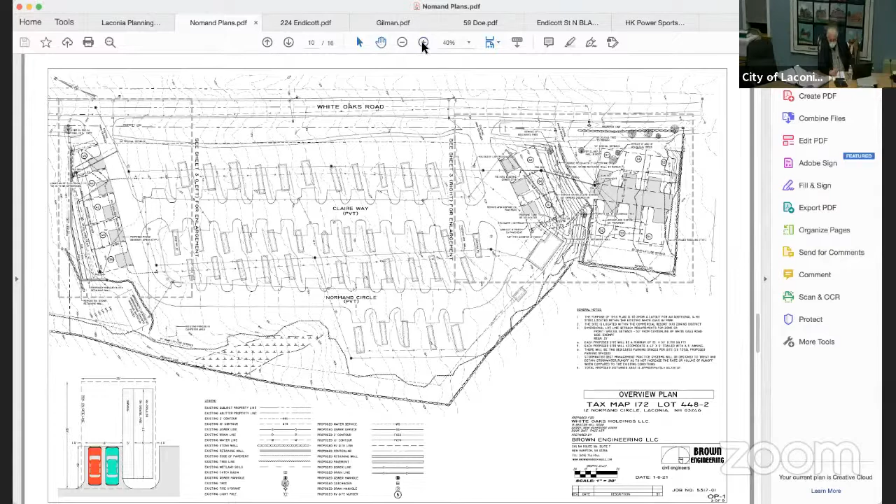The new RV sites that are going to be added, labeled 38 through 46, the even numbers anyway, are going to be built up, and there's a retaining wall being built, and then there's a swale between the actual sites and the retaining wall. That swale will control the runoff from those new sites and direct it to an area near White Oaks Road, where what's left that doesn't percolate through the swale will drain where the present drainage goes right now.

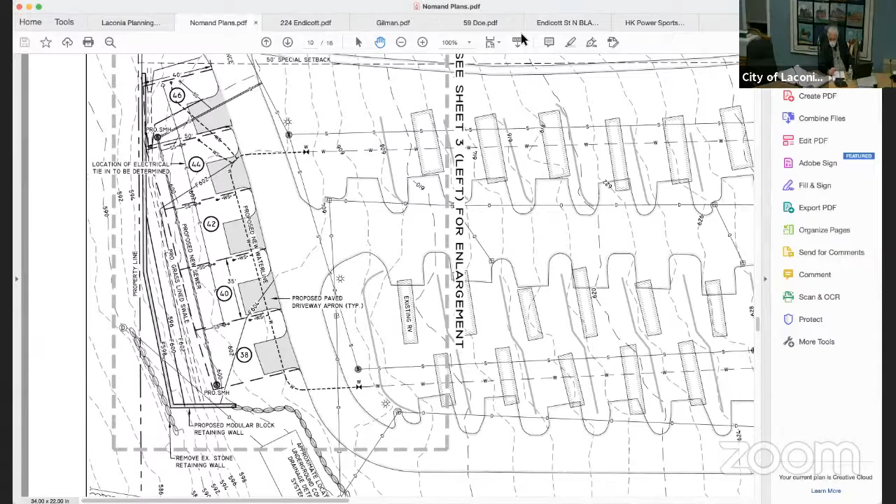By constructing these 5 RV sites, they are in effect eliminating a slope there that drains from their driveway to the adjacent property, and they have mostly eliminated that slope on their property and will contain most of the stormwater on their property. So I know there was a question about what is going to happen to that stormwater, and that's the explanation. The analysis by Brown Engineering shows there will be equal or less runoff onto the adjacent property than is currently the situation.

There was also a question about the existing stormwater structure adjacent to that area, and where the drain line indicated on the plan goes. We looked at an old plan that shows that drain line continues all the way through the adjacent property and goes to the existing stormwater system out on Endicott Street East. So the drain from that stormwater structure does not dump on the adjacent land. It continues in an enclosed system all the way to Endicott Street, where it's joined with the regular stormwater drainage system already in existence on the street.

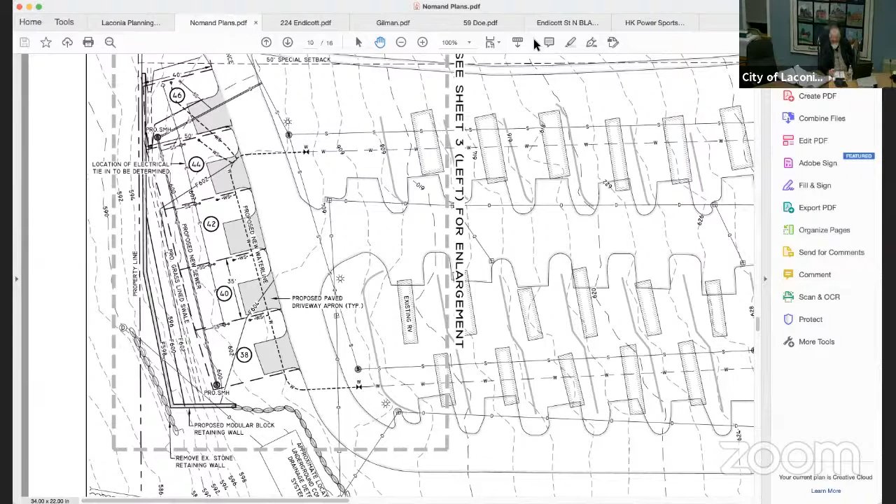So overall, there should be less drainage from this site onto the adjacent subject property. So when the stormwater leaves the property, does it enter a catch basin on the street, which is then conveyed to? The drain line connects directly to a stormwater basin on Endicott Street East, yes.

The swale that's being constructed behind these 5 new sites will capture the water, treat it, and in most cases the water will just percolate through the ground right there. During occasional heavy rain, there will be a discharge from that swale near White Oaks Road, and that will go to the adjacent property just as their stormwater currently does, but the calculations show there will be less of it.

And the swale is intended to treat the stormwater before it is conveyed off, right? Treat it and catch some of it. Yes, so of the siltation and all that. Yes. All right, are there any questions for Mr. Trefethen from members of the board, or for the applicant's representative?

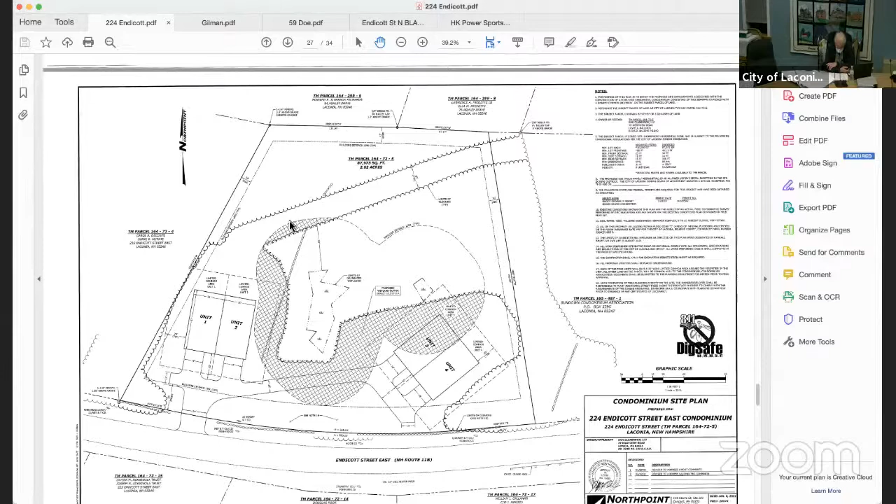We have had a discussion with one of the abutters. The way the stormwater is designed, it is going from the driveways and the roof lines to the existing wetlands that are on the applicant's property. There is already some natural drainage across the land. It goes in a northeasterly direction to the upper right-hand corner of the applicant's property, that's the direction of flow. There are some wet areas on adjacent properties that I suspect are naturally occurring, and I don't see that there's anything that's going to change there.

Okay, because I know that is a maintenance issue, they are in there quite often putting additional salt and sand down. Yep. Okay, any other questions for staff?

Oh hell, Peter, I'm sorry, I do. Don't be sorry, Mr. St. Clair. Pain in the butt, I know. But Dean, I'm just concerned, do you see any downside at all to not requiring the lighting and or the landscaping from your point of view or the department's point of view? Well, we would get to the staff's report probably after the public hearing, right? Well, you asked if we had any questions, so that's why I was asking. Oh, but yeah, that's true.

If they were going to be putting in some pole lights or things of that nature, then we would like to see a lighting plan. Basically the lighting plan shows what kind of lights you're going to have and the foot candle intensity that's going to occur around them. Since they're not going to have any pole lamps, they're only going to have standard residential downward cast lights attached to the sides of the building. There really is no need for us to look at that.

Is that a condition that you're recommending in your staff report? That the lighting we have be done? No problem, we have no problem waiving the lighting plan or the landscaping plan. All right, thank you.

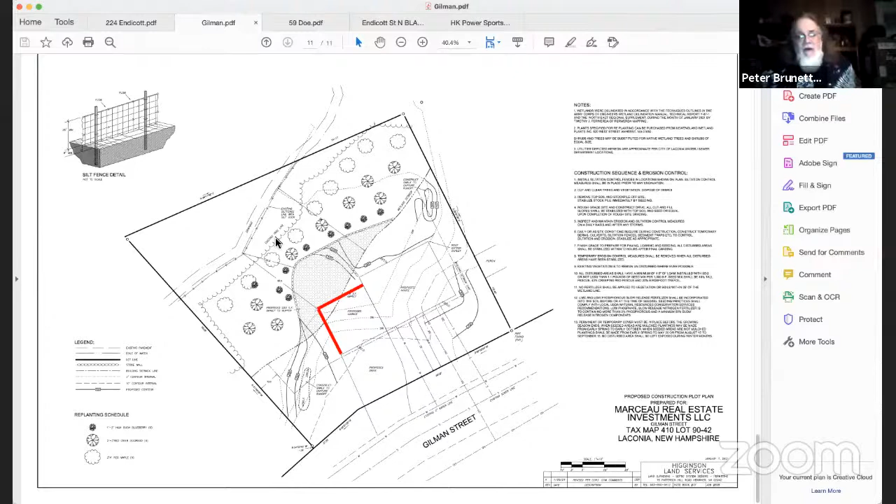All right, any questions from the members of the board for the applicant? All right, let's go to the public hearing then. We're opening the public hearing at 8:32 p.m. Are there any abutters or members of the public that wish to be heard?

Mr. Chairman, no abutters from the public have indicated that they wish to speak for or against the application. All right, thank you. That means we're going to close the public hearing now at 8:33 p.m.

We will listen to the staff report. This application has gone to the Conservation Commission. The original plan called for the garage to be lined up with the rear of the house, and they recommended pushing it forward to get as much as possible out of the buffer zone, which the applicant has done. They also recommended vegetation of certain kinds in the buffer area behind the house, and the applicant has agreed to do that, and we'll do the silt sock during construction.

Staff recommends approval of the CUP and the waivers. In this case, the waiver is for underground utilities. This is a mature neighborhood; all of the other houses have overhead utilities, and unfortunately the utility poles are across the street, which would necessitate cutting into the street to do underground utilities. Given the circumstances, we don't think that's in the overall best interests of the city, so we're in favor of the waiver for underground utilities. I think that's consistent with past practice where we're dealing with infill development.

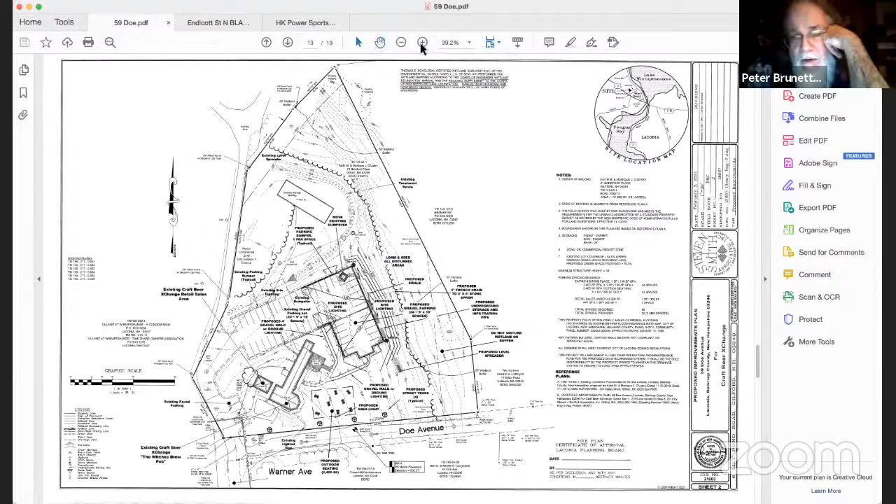It's not located in close proximity to any other properties really where sidewalks or pedestrian pathways are located. It's not near any intersections with controlled traffic. It's not in close proximity to any schools, community centers, healthcare facilities, playgrounds, shopping centers, et cetera, as the ordinance talks about. And I might add that it's on quite a hill and no one wants to walk up that hill. Well, it's not a hazard to aviation either, I hope.

All right, so seriously, thank you. Are there any questions for Mr. Howard?

Sensing none, I'm going to open the public hearing at 8:42 p.m. Are there any members of the public or abutters that wish to be heard regarding the brew pub on Doe Ave? Anybody? Chair, nobody has indicated online or in person here that they wish to speak for or against the application. Okay, thank you very much. I guess we will close the public hearing now at 8:43 p.m.

And the staff will inform us, please. Staff recommendations include approving the waiver again for the sidewalks. We don't believe that this proposal substantially changes the dynamics in the area, that their parking and use is all contained on their site. Not a place that people would normally walk to. Other than that, the recommendations are pretty much normal. There's nothing unusual going on here.

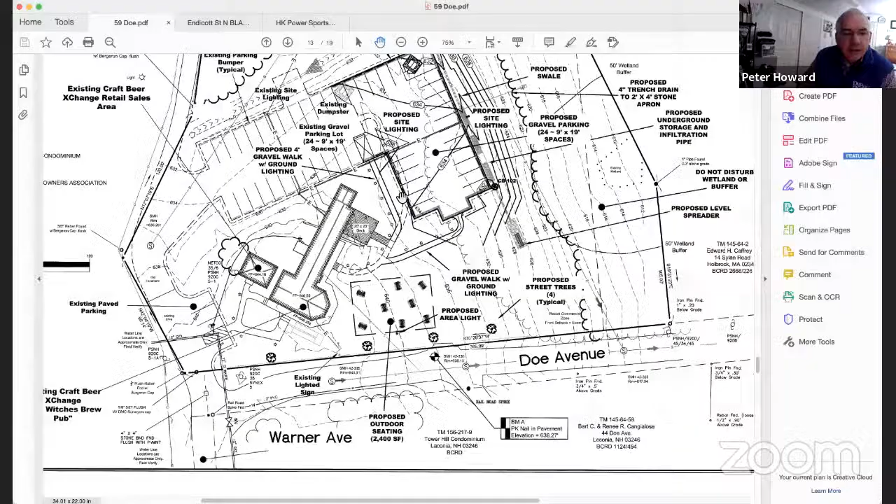On the stormwater, when we made this submission in 2019, if you look at the parking lot that we originally did, it's sort of on the north side of the house. All of that water runoff grades towards the north into a swale, a treatment swale, and then it goes to the far north corner of the property and is outlet by way of a level lip spreader. So what I did on this was I totally isolated the new runoff on the new parking that we're proposing so that it would not mix with the runoff from the original parking that we designed.

The new parking area is graded so that it will go to the east, or downhill, and it's going to be caught in a swale at the bottom, right at the edge of the parking area. I've had two catch basins built; the water will get into those catch basins. They're deep catch basins, so we can get plenty of sump area if we need it. But then we're going to go into an oversized perforated pipe, which is going to be surrounded by stone. That's going to provide the storage and treatment needed for any runoff from this parking lot. And it's only runoff from the parking that's going to go into this stormwater system that we're proposing.

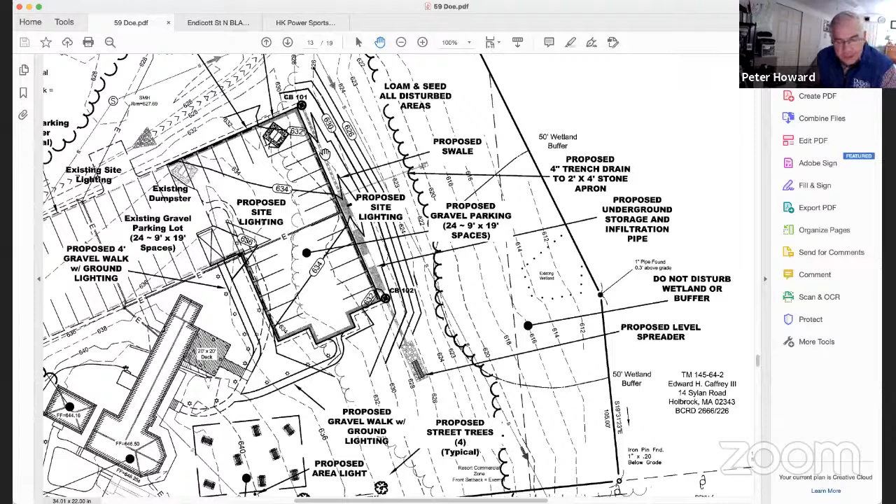No, that was a very detailed answer. Thank you, Mr. Howard. Do the members of the board have any questions for Mr. Howard?

All right. Where are we at now? We have held the public hearing and now we're waiting for a motion, are we not?

Mr. Chair, I have a question. That's probably more towards, I guess, staff. It could be to Mr. Howard, but this is just for the parking spaces and the sidewalk waiver, correct? We're not talking about turning the COVID outside seating into permanent approval, correct?

No, we are talking that. Yes, he wants to set up the outdoor seating on a permanent basis, hence the need for additional parking. Because last year, when they were doing primarily just outside dining, the existing parking that they already had served that purpose because there was basically no one going inside. So the parking that was there serviced the outside.

They're hoping, and I think we're all hoping, that relatively soon, restaurants are going to be able to open up to a greater capacity than they have been recently. And therefore he'll have potentially at some time in the near future, full capacity inside, which the original parking took care of, and also offer the outdoor dining area as an additional seating area, in which case he would need more parking.

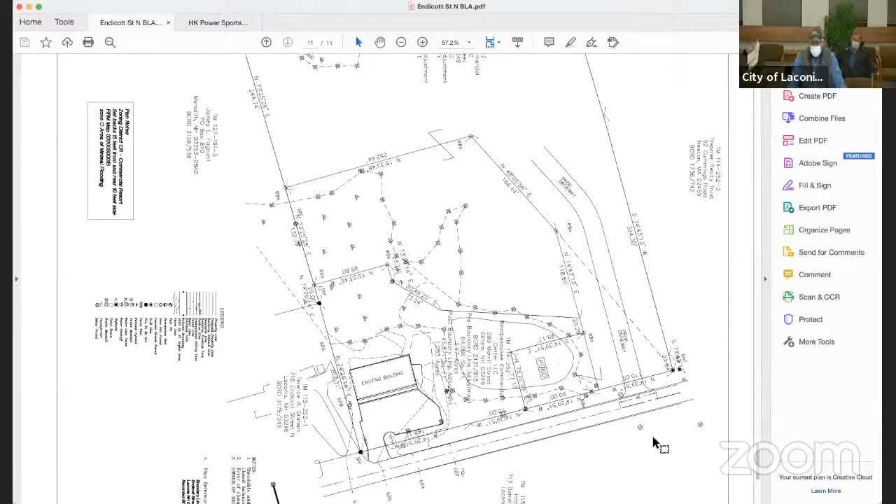I remember this application from many years ago, and a sidewalk waiver was discussed at that time. That's correct, I forget whether it was granted. Is there a sidewalk there? There is not, the state did not allow it. Yes, the right-of-way issue, we're gonna have to get them a seat at the table.

Are there any questions for the applicant? Being none, I'm going to call the public hearing open at 9 p.m. Are there any members of the public or abutters that wish to be heard? Mr. Chair, nobody has indicated they wish to speak for or against this application. Thank you, we'll close the public hearing at 9 p.m.

Staff recommendation, please. Staff recommends approval. There's nothing unusual going on here. I know the proposed new boundary line is a little weird, but there's a reason for that. It's so the existing lot and the adjacent lot both have enough area and street frontage to allow them to exist. Just in case there was a question about that.

Okay, and because this isn't a site plan or a CUP, the sidewalk waiver is not required. Correct. All right, any questions for staff on this application? Sensing none, what is the pleasure of the board?

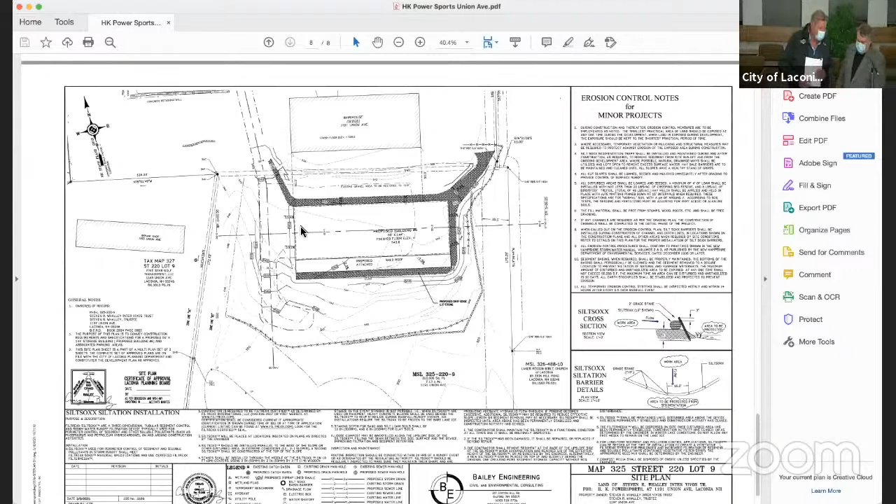And now we would like to hear from the applicant. My name is Steven Whalley, I'm the owner of the property, and I also own HK Power Sports, the business. This is an accessory warehouse building we'd like to construct. It's very similar to three other similar sized buildings, same construction type. We've been here in the last year and got boundary line adjustments and purchased the land behind the golf cart guy, which used to belong to the Bible school. It's almost not visible from Union Avenue in any way.

It'll be minimal impact, less than 2,000 feet of pavement. The building itself is about 7,000 feet, and there'll be about a 1,200 square foot lean-to on the south side of it to park some construction equipment and stuff we have. It will be in character with what we're doing. We've been there for 36 years, and we keep growing and trying to keep things organized and stored properly, and this will be an important link to that.

This is Attorney Phil Brouillard representing Mr. Whalley. Just want the board to understand this is just a freestanding building, and the only utility it has is electric for lights. There's no bathroom, no water, very little else - it's just freestanding storage. We've also had a chance to review staff's application and we agree with all their conditions. We do need to update the plans to show the electric line running from the last building to this building. We thank you for your attention tonight, and if you have any questions, we'd be happy to answer them.

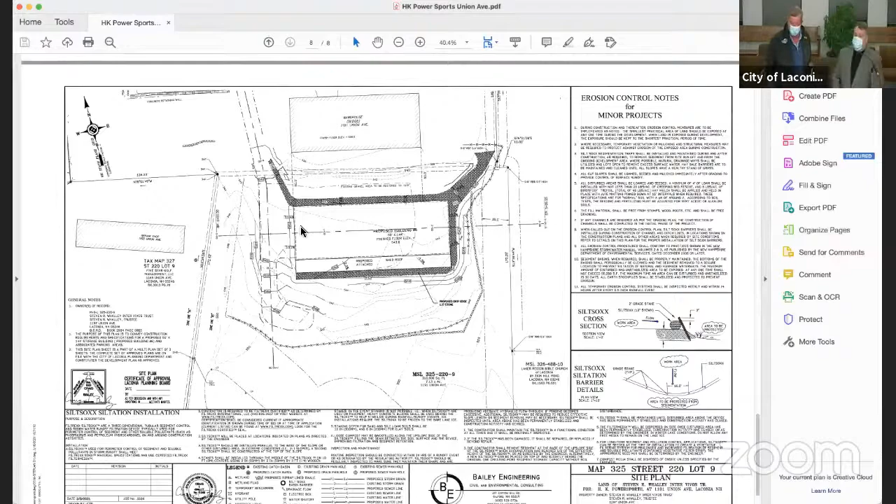Thank you, Attorney Brouillard. Are there any questions for Attorney Brouillard or the applicant? Yes, Mr. Chair, Ms. Susie - is this building going to be taller than the other three? It sits slightly higher on the land since the lay of the land climbs up there; I think it's probably detailed on the plan. I'm guessing it could be 4 or 5 feet higher on the floor height, and there's a possibility the building itself would be 2 feet higher than the last building. The building's about 18 feet high.

Is that at the peak or the eaves? The peak. At the peak, okay. All right, any other questions for Mr. Brouillard or Mr. Whalley?

Well, there being none, I'm going to open the public hearing now at 9:06 p.m. Are there any abutters or members of the public that wish to be heard on this application? Mr. Chair, nobody else is present or has indicated online that they wish to speak for or against the application. Thank you very much, Mr. Moore. Close the public hearing at 9:07 p.m.

Staff recommends approval of the plan. This is really just the orderly expansion of the business. We joked at the technical review committee that they were kind of setting up dominoes, and if you knock one building, they're all going to go over, but they're all lined up, and it's nice to see a business being successful and having the need to expand the way that they have.